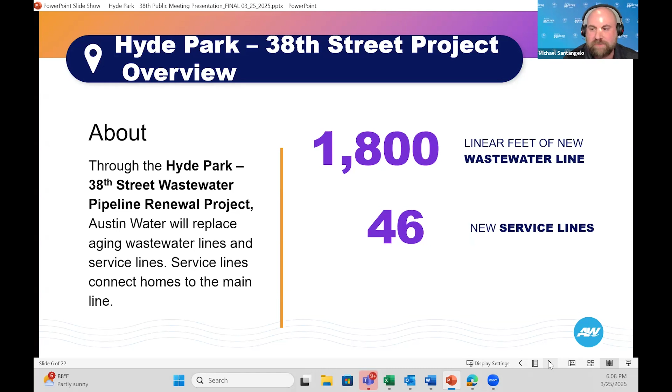My name is Michael Santangelo, I've already introduced myself. Through the Hyde Park 38th Street wastewater renewal project, Austin Water will replace aging wastewater lines and service lines. Service lines connect homes to the main line. We will be replacing 1,800 linear feet of wastewater line and 46 new service lines.

In these locations, we will be installing new wastewater lines where the current wastewater lines are. The contractor will do this work in segments, which goes from manhole to manhole, and we will use a technique called bypass pumping while we're working on each segment to make sure your service is ongoing.

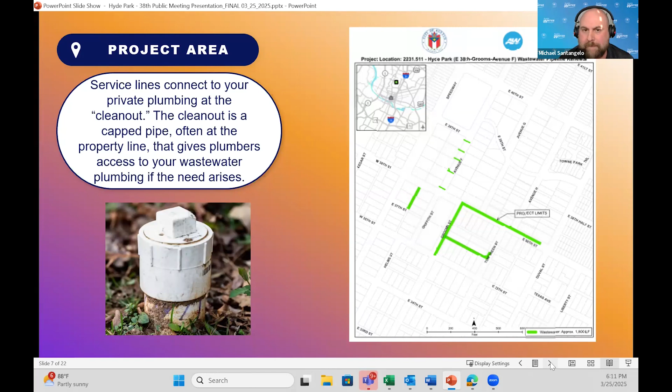Hey everyone, my name is Atha Phillips. I'm here to walk you through what to expect in the year ahead as the project progresses.

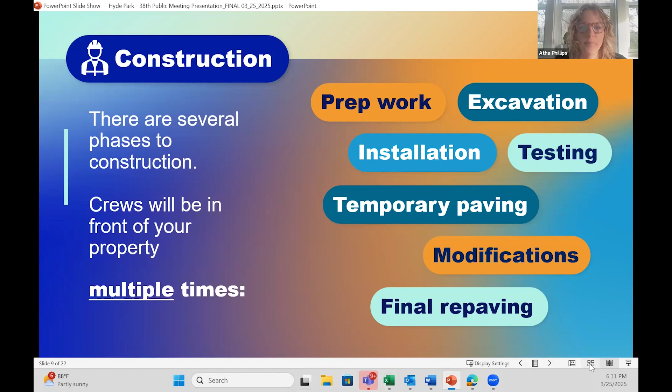This project addresses mainly local wastewater lines, which means that we're going to be in your neighborhood. Construction is messy, it's intensive, and sometimes it can be unpredictable. But our team will do everything possible to minimize the disturbance for you, your family, and your neighbors.

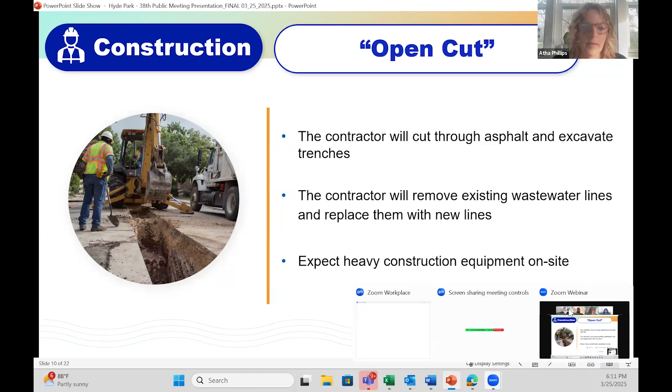Since this project is largely underground, we will need to bring in heavy equipment that is capable of cutting through asphalt and also trenching, so the contractor can remove the old pipes and then install the new pipes. When they're finished with each segment, the road will be temporarily repaired.

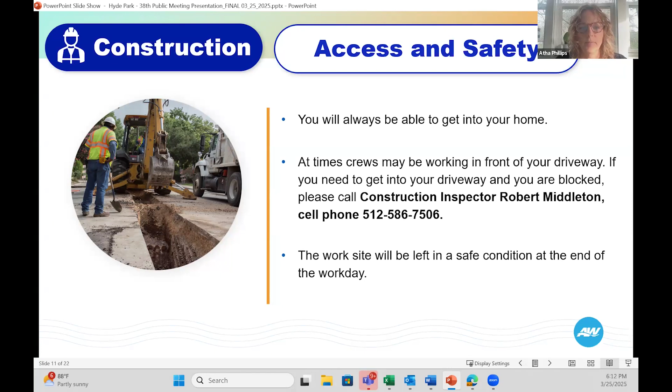We want you to know that at no time will you not be able to get in or out of your home. If you find yourself blocked for any reason, please call the city's inspector, Robert Middleton. Each day before the construction crews leave, they will ensure that the open trenches are covered and secure.

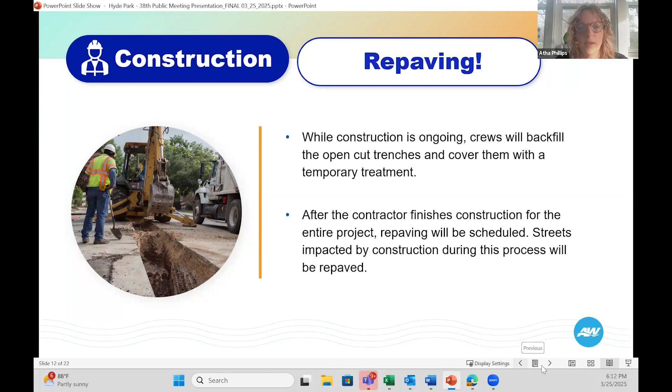At the end of each phase, the street will be temporarily repaired, and towards the end of the project, the affected streets will be repaved and vegetation will be restored.

The schedule for the overall project is slated for just over a year, but please keep in mind that each segment will last for a much smaller period of time. I want to make sure that you're aware the city has an ordinance that prevents work between the hours of 7 p.m. and 7 a.m. As I hand the mic over to Robert Middleton, I want to reassure you that Robert and I, along with the contractor, will work together to make sure this very necessary project is as painless as possible. Thank you.

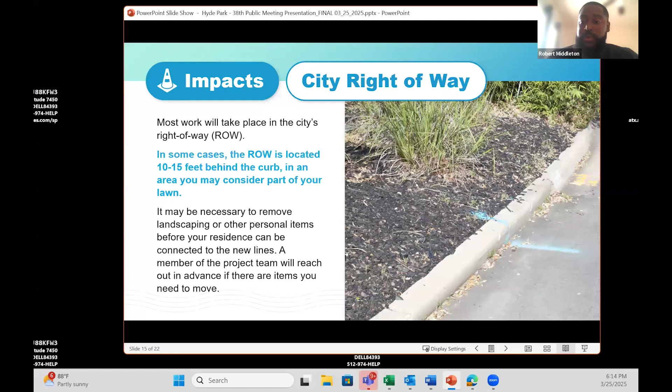Yeah, so I'll basically be the engineer's eyes and ears, as well as making sure that the contractor and I will be working with the engineer on contract conformity and everything of that nature. Understand that the right of way is going to be 10 to 15 feet behind the curb line. There will be some residents where we will be replacing service lines. So basically that means from sidewalk to sidewalk we will have some traffic control, things of that nature. We will have signs out in your neighborhoods, so we'll try to keep you guys pretty safe.

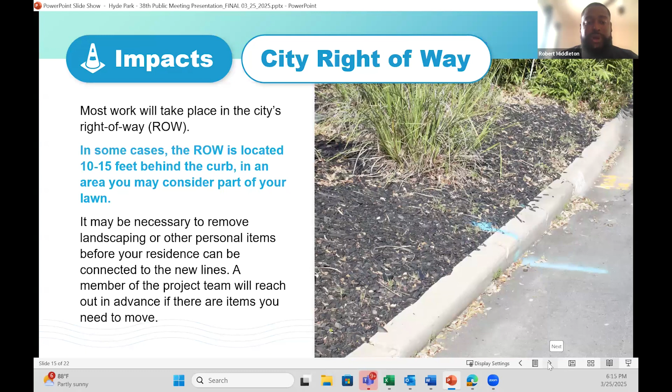If you have any questions, if there's any machinery blocking your way, please give me a call. If there's anything obstructing you, please give me a call. If your street is being worked on, or if you have any questions about the construction, how long it's going to take, please don't hesitate to give me a call, and I'll try to keep you as informed as possible. The right of way is from sidewalk to sidewalk, so if you have children or anything like that, that's something they'll have to look out for, but we'll try to keep everyone safe.

Robert, I just moved to the next slide. I don't know if you're seeing it or not, but this is emphasizing that the contractors are going to work really hard to avoid damaging any landscape features. But a lot of times people think that the right of way is actually in their yard.

So there may be things that are in the right of way that you need to move. If anything is damaged at any point in the project, please immediately call Robert, his cell phone is on the screen right now. Please call him and let him know, that's part of what he's there for. Also, someone from the project team will be in touch if it looks like you have private features, landscaping, or something like that in the right of way that you need to move.

Robert, would you say that's fair? That is correct. I'll try to keep you and whatever superintendents out there informed. We do take pre-construction videos, and I will try to keep you informed. If we are on your street, if I do see something that may need to be moved, there is somewhere in the contract where we do actually fix any disturbed vegetation, which that's grass. It will be a different situation if we do have to get on what's considered private, anywhere between that, after that 15 feet. We will work with you and try to be amiable and replace any damaged features.

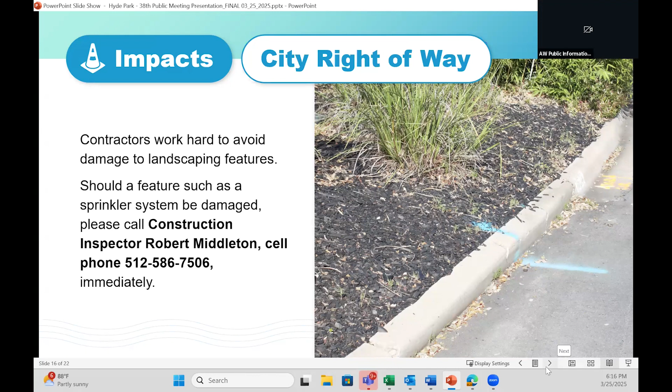Yeah, like Robert said, he will be taking pictures of everything before anything starts, so we have documentation to know how to put things back together.

Robert, do you want to talk about tree trimming? Yes, with tree trimming, there is a clearance level, and as you do see on the screen, normally for the sidewalk, it is 8 feet. Normally for streets, it's 14 feet clearance for 18-wheelers and things of that nature, any trucking or anything like that.

If you do have personal trees, if they are in the right of way, remember that is the city's property. If there's clearance that we need to do, we will do that. We will try to inform you if there's anything that we need to do that's considered your property. Please give me a call, but we will be working with the arborist and the construction crews out there. And if you do have any questions for them, please give me a call.

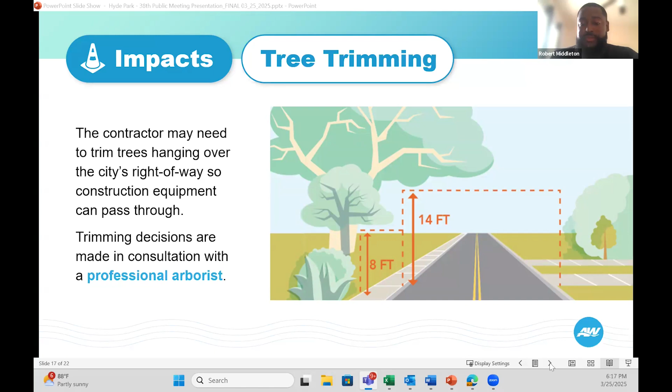Okay, Robert, tell us some about traffic impacts. This is always a big concern to folks. As you see, we do have signage out there. We will have flaggers at times. There won't be any reason to block your driveway permanently or anything like that. Keep in mind that we do have heavy machinery crossing in some places, but we normally keep easements and driveways open. If for any reason it's blocked for a limited amount of time and you have a worry about that, you see my cell phone number, please give me a call.

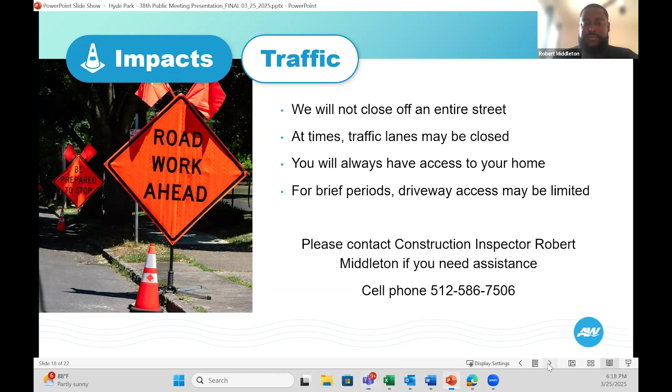Okay, here's another big one: trash, recycling, and compost. Robert, you want to take this one? Your trash cans will be picked up, we'll keep it as simple as that. If there is a complication or anything like that, we'll work with the contractor. But for the most part, it shouldn't impede on your trash can being picked up.

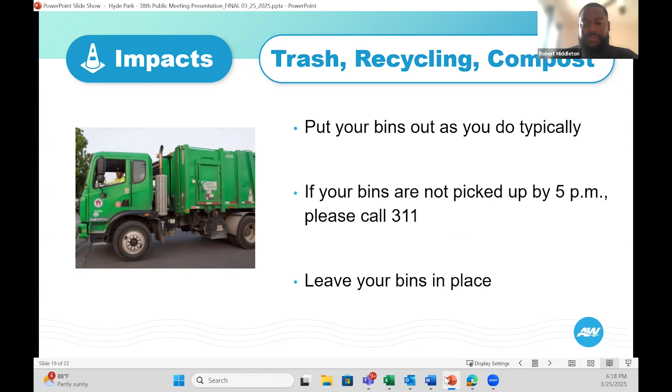Okay, that's it for our presentation, but here we are at the most important part of the evening, which is Q&A. So who's got questions? There are a couple of ways you can participate. Lydia, if you can help me watch for any Q&A in the chat, or if anyone is trying to call through the phone, that would be appreciated. But who's got questions?

Oh, I know someone's got a question. Don't be shy. No questions?

Well, if there are no questions, then let's just make sure that you share this with your neighbors. We will post this on the website page, both a video of this presentation as well as the PowerPoint. And we hope that you'll share with your neighbors, tell them that this is coming and that we're actually a really nice group of people who want to make this work as well as possible.